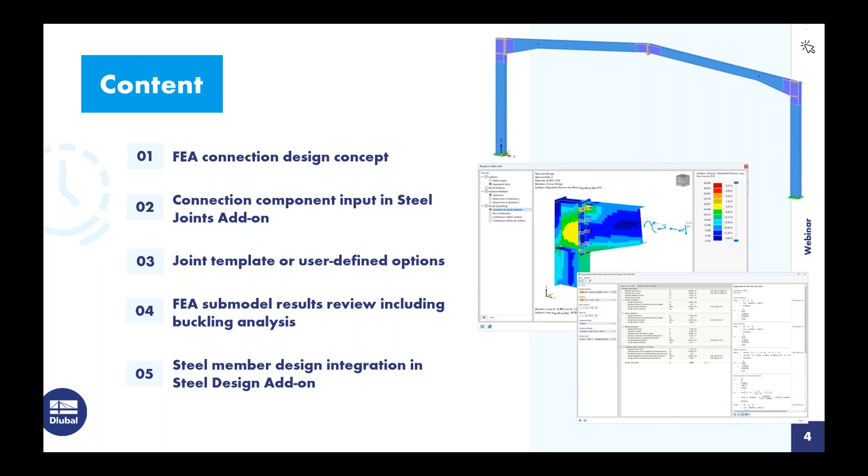So we might be wondering, well, why would we utilize FEA for steel connection design? And obviously the biggest benefit is going to be the design of non-standard or unique connections. So most likely you have a solution for very basic or standard connections. A lot of software offers this, or even hand calculations. But when we look at this connection over here on the right-hand side with a lot of different components going on, it becomes a little bit more difficult.

So this new steel joints add-on within RFEM allows us to consider the components and the members both in plane and out of plane in one single FEA model. We also can consider complex loading. So if we are modeling the entire steel structure within RFEM, we can apply any of the member loads or unique loading scenarios to the structure itself. The member internal forces at the member ends at the joint will simply be used for the connection design.

So no need to integrate those member end forces into an external program. Again, everything is done within this single file. The submodel is automatically generated underneath the hood of RFEM. So this really doesn't require an expertise level knowing how to create these FEA models. They are rather complex, but rather if you just have a general FEA knowledge, you can go ahead and utilize this capability within the program.

We also will perform the AISC design checks of these connections for our bolts, our welds, and our plates, but we will take it a step further to create a second submodel to carry out the buckling analysis. So we'll be able to view the different eigenmodes and failure buckling modes of this connection, as well as the critical load factors. We'll see that a little bit further in the example today.

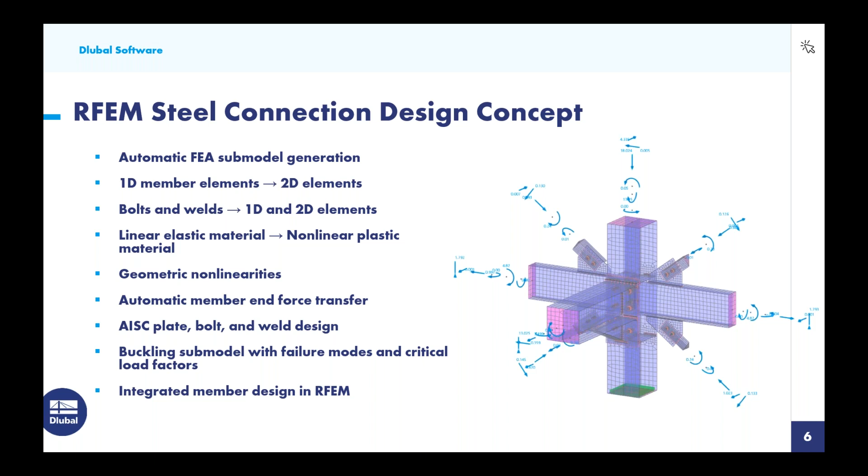And finally, the integrated member design within RFEM. Of course, we can get the connection design, but the ability to design the members themselves, and not just steel, but any material that we offer. So you could combine this connection design with concrete, aluminum, cold form steel, even topics like fabric tensile structures. We could do the steel connection design within that same file.

Okay, so we will begin then in RFEM here with our initial example. When we create a new model, we will give it a model name. The type of model here is going to be in a 3D environment. So although we just have a simplified 2D frame here, we still are accounting for all forces in and out of plane.

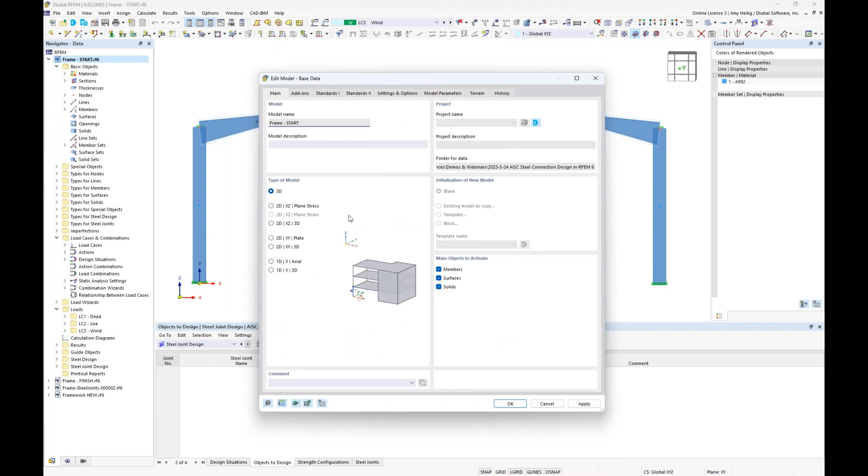Under the second tab, so for those of you who are not familiar with our program, RFEM is the base program. This is where we can fully model, load a structure, and get the full static analysis. But if we want to do a more advanced analysis like dynamics, for example, or we want to do design according to the various standards, this is where we would need to activate these optional add-ons. So you would purchase the add-ons that are specific for your project design.

Now for today, we'll be activating here the steel design. So this carries out the steel member design according to the AISC, and of course the steel joints for our connection design.

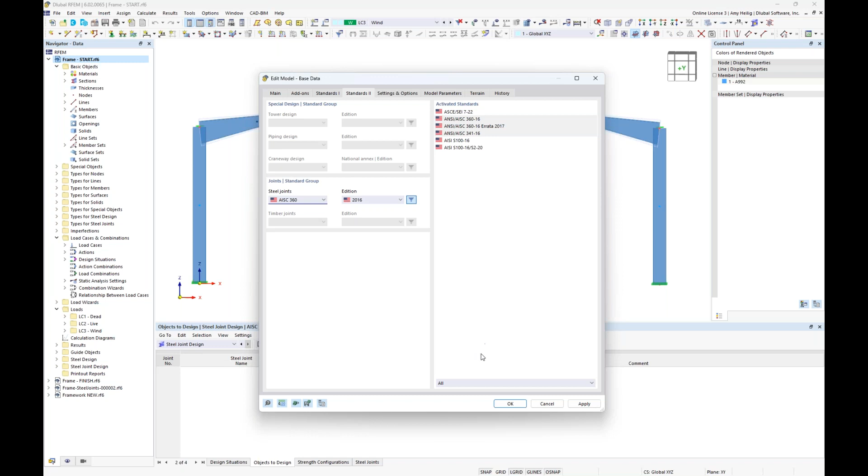Under the third tab, we will generate the load combinations automatically according to the ASCE 7. We have added the 2022 standard, so that's available here. The steel member design will be carried out according to the AISC 360 2016. And under our fourth tab here, standards 2, the steel connection design will be carried out also according to the AISC 360.

So once all of this information is input into our base data, as you can see here for the sake of time, I've already modeled this simple 2D frame here. So let us just quickly go over some of the information already shown.

Well, if we turn this into wireframe view, these members, as I mentioned, are just standard one-dimensional elements. So this is pretty usual for any FEA program, that when we model columns or beams or braces, they're represented by this single line only. But if we turn this into rendered view, we get a better understanding of what this line represents.

Now, we also have here the materials assigned to these members, and currently these are all A992 linear elastic materials. We also have our cross sections.

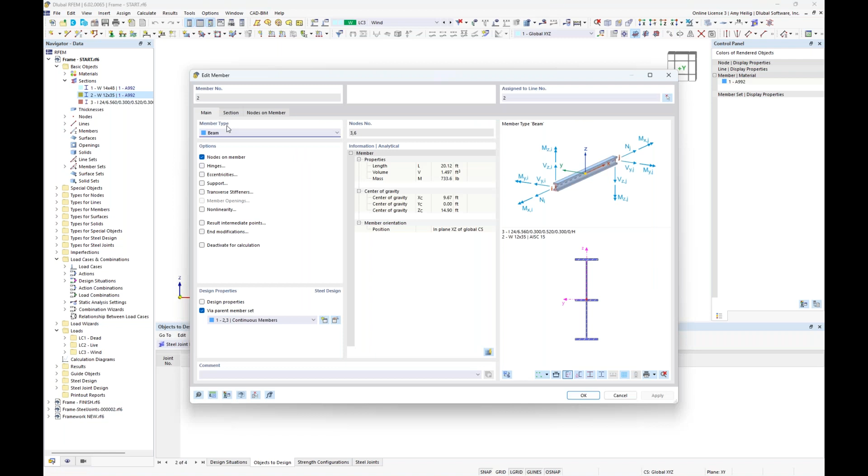You can see here the columns are assigned as W14x48. And for my beam members, these are W12x35s. But I also have applied a small taper at the beam member end. So if we double click on this member to go into the beam dialog box, under the second tab here, section, we do have the ability to set a taper at the member start or the member end and other multiple options here.

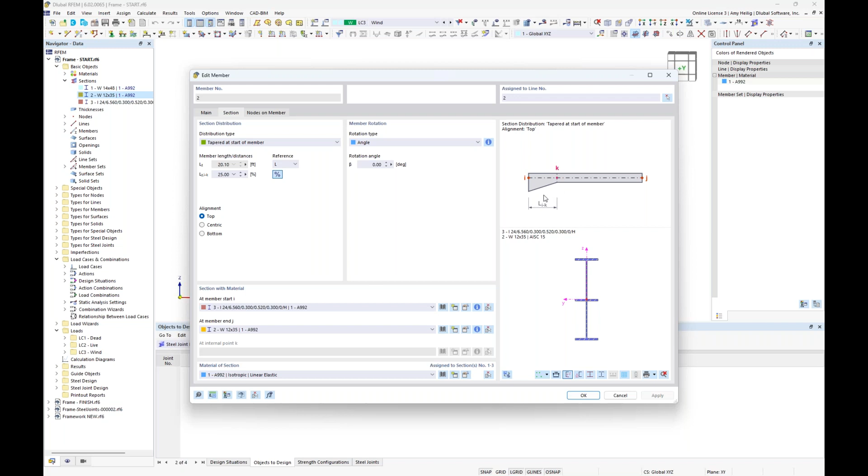So I'm currently applying this taper at the first 25% of the member length. And we also can align the taper to the top of the member, for example, and this picture over here will update accordingly. So as mentioned, the beams are primarily W12x35, but where this taper occurs at the member start, I took that W12x35, I created it as a user-defined section to simply increase the depth. So now we'll linearly transition in the first 25% of this beam member back to the W12x35. So that's a little bit about what's going on with our members.

So turning this back into wireframe view to quickly explain our support conditions, we have a fully fixed support down here at the bottom, which was just applied by utilizing the assign nodal support up here in my toolbar. And also because we are working in a 3D environment, I went ahead and put some additional spring supports up here only in the lateral global Y direction. So we'll account for maybe additional members framing in to give that lateral stability at the top of our frame.

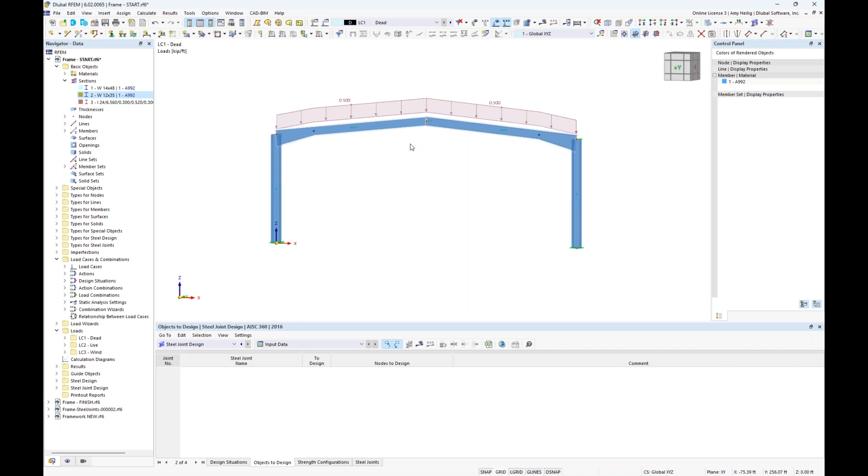And finally, we want to cover the loading. So we have 3 simple load cases for today, and we can see these within our drop-down box up here at the top. If I turn on my loads, my dead load is 0.5 kips per foot, applied as a member load. When we look at our live load, same concept here, just with a reduced magnitude of 0.3 kips per foot. And then a very simple lateral load here for our wind load case with 0.3 kips per foot at the front side and 0.15 kips per foot at the rear side.

Going into our load cases and combinations dialog box, we will once again see here under our load cases our 3 simple load cases for today, dead, live, and wind. Category was set accordingly to the ASCE 7. The program is automatically going to generate 2 design situations for us. We have here our LRFD design situation and our ASD design situation. This is really nothing more than just grouping together all of our factored load combinations according to the ASCE 7 for this first design situation. And we can click on this little info button here to see the code references to those load combinations directly.

Now notice that these are used within these optional add-ons that we turned on, so steel design and our steel joint or connection design. I will be utilizing these design situations. I'm carrying out my design according to LRFD for today. Now we also have this second design situation, which is just simply grouping together our unfactored load combinations. I'm going to use this for my serviceability checks for my steel member design, but we really don't need it for our connection design because serviceability is not something that we're going to check.

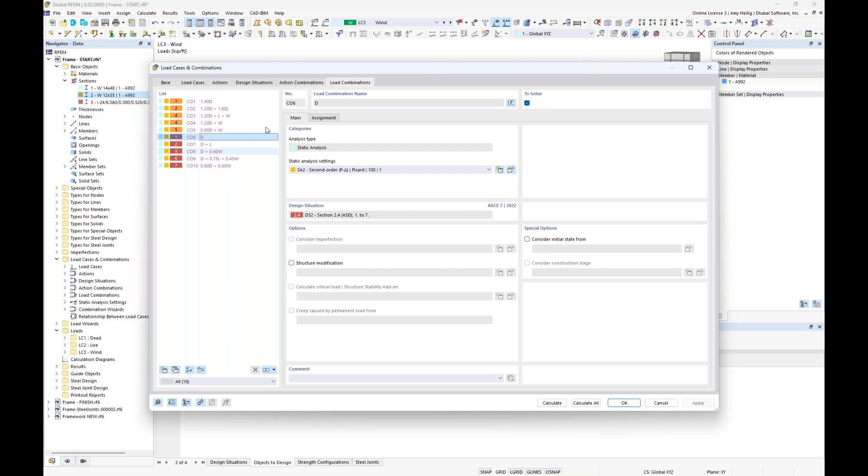Now, alternatively, if you were carrying out ASD design for both your members and your connections, we could go ahead and turn it on here and maybe we deactivate it for the LRFD design situation. But again, moving forward with LRFD design, we'll go ahead and leave these options as default. And finally, under the load combinations, you can see here the individual load combinations listed out based on the load cases I have defined. All of my factored load combinations are shown here in orange, which belong to that first design situation. And then we have our unfactored load combinations shown in red that belong to the second design situation. So just keep these design situations in mind. We'll come back to them a little bit later on.

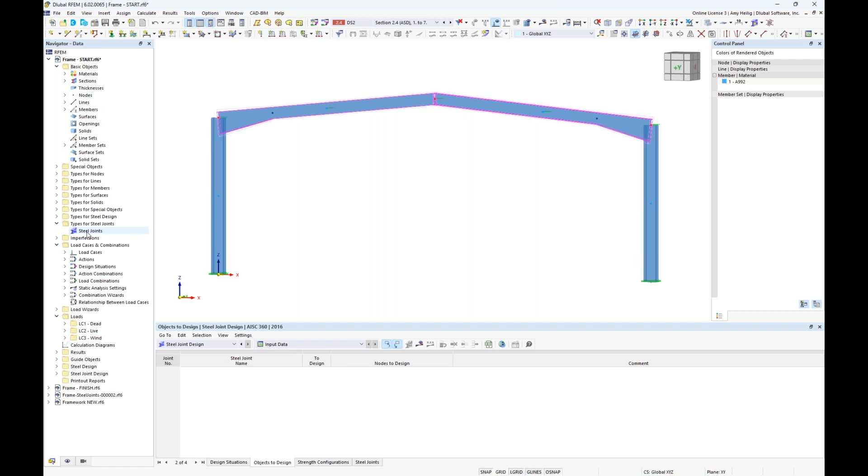So now that we have fully reviewed this model, let us begin by defining our first connection. So because I have activated the steel joints add-on under my base data, we now have a folder option over here on the left called types for steel joints. Well, currently this is empty, but I can right click to create a new steel joint. And initially, I want to select the node that I would like to apply my first connection. So we can graphically select node number 6, or I could directly input the number here into this dialog box. Both of my members were automatically brought in.

Looking at this second tab. So remember that we are going to more or less extract out this submodel for our connection design and run it completely separate from our steel frame that's happening here in RFEM. And because of this, we need to fully support one of these members in that submodel. So we'll go ahead and utilize the support for the beam over on the left.

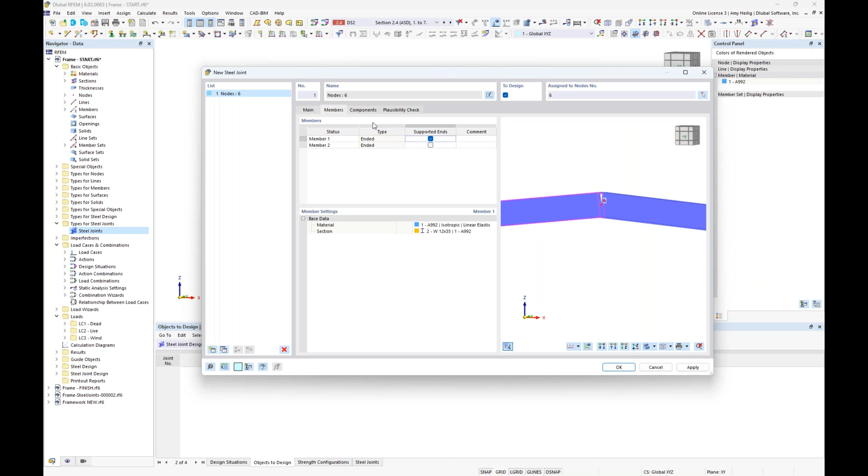Now the type is set to ended. This only means that if all of these members simply end at this connection, then the type would be set to ended. Now, in another scenario where we maybe had a continuous column passing up through here, but it was modeled as two separate members back in RFEM, then we would have an additional type option available to us in a dropdown called continuous.

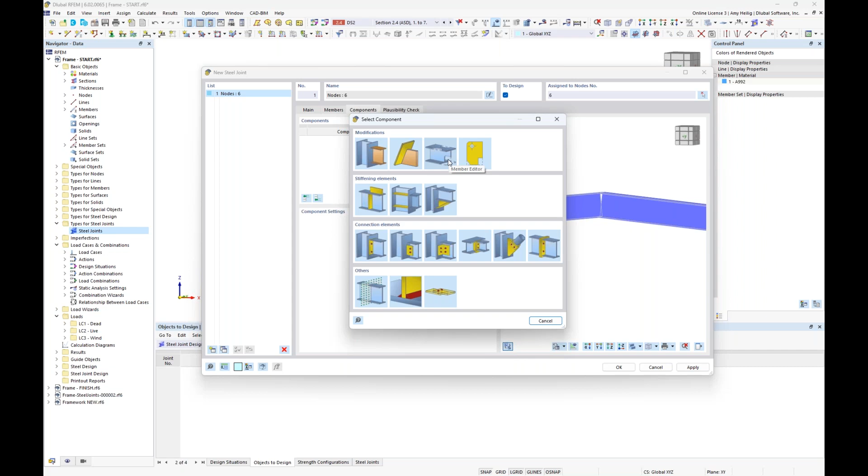Under the Components tab, this is where we begin to build up our connection components. And we could certainly individually do this with our component database. And we see each one of these components that we can individually input, such as end plates, or we can input fin plates, cleats, maybe plate-to-plate connections for beam splices. We also have stiffeners and haunches, and then we have some additional modifications up here that more so relate to the geometry. So we can make member cuts, or we can add in openings or notches into our beam elements.

But rather than inputting these individual components, we could also take advantage here of our library options. And within these joint template library options, we have 4 general categories, including rigid connections, pin connections. We also have truss connections and brace connections. So beginning here with the rigid connections, we have additional subcategories such as beam to column, and so on. And within these subcategories, we have additional template options.

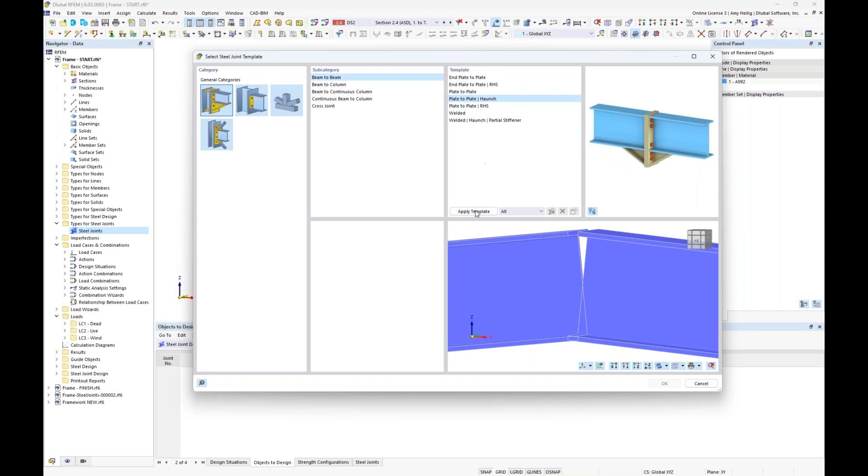So looking at the beam to beam, we have an end plate to plate. We have an end plate to plate with a rectangular hollow section. For today, we're going to utilize this option plate to plate with a haunch. So when I click apply template here, it's automatically going to apply these components from this library to my specific members here within my RFEM model. So I can click OK, and now we see these individual components listed out here and applied again to the members within the RFEM model background.

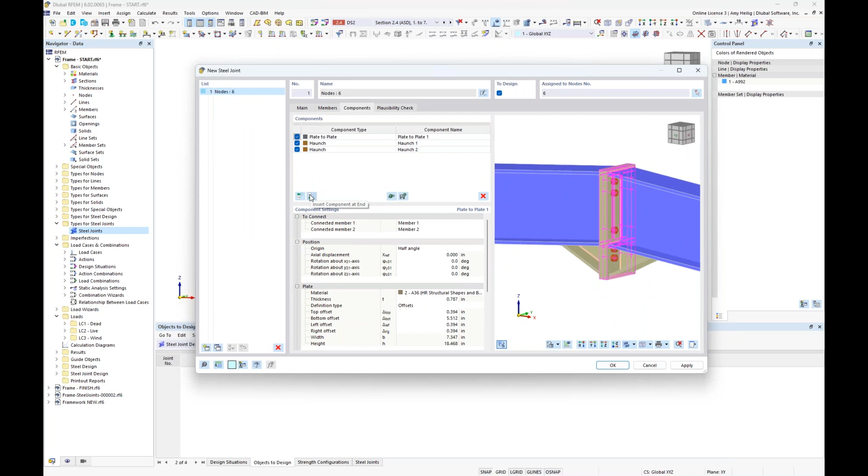Now, we could certainly add on with the individual components here and just use the library as a starting point. We'll certainly need to make some modifications here to our geometry, but once you have your connection set and you utilize this connection quite often, it's always recommended to save this under your own user-defined template as well. So you can see here within this button, we could give the connection a name, set the filter categories and subcategories, and now that connection will always be available for any future RFEM model. So that could certainly be helpful if you don't want to redefine the geometry changes or components every time.

So starting off with the first component, you can see here it is plate to plate. We are connecting both members 1 and 2. We can make modifications to the position, but we'll go ahead and leave all of this as default. Now we do need to define the material of these plates. I already have A36 defined within my RFEM model, but if you did not, you could just access our material dialog box with these 3 buttons here.

So within the material dialog box, we can further activate the material library. Over on the left, utilizing our filters to steel, to the AISC 360, then we could go ahead and choose whichever relevant steel material we'd like for this particular component. Again, utilizing the A36 that's already been defined, I will modify here the thickness of my plate. So we can go ahead and change each plate to 0.5 inches thick for a total thickness of 1 inch.

And now we need to define the plate offset. The offset just means what is the distance from the top of the plate to the top of the flange, and then the bottom of the flange to the bottom of the plate, as well as left and right. So starting off with the top offset, I'm going to modify this to actually a negative 0.375 value. I'm going to drop this plate down below the top flanges here on my beam in the event that we have some type of sheathing material that we don't want to interfere here with these plates.

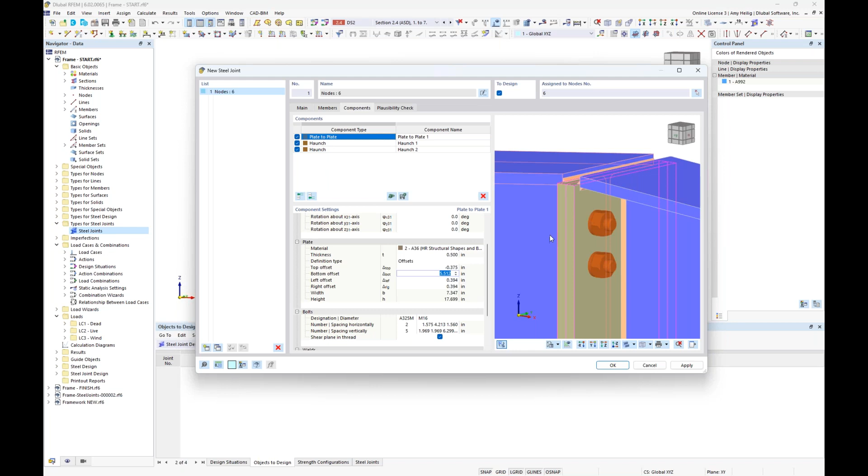Now, as far as my bottom offset, we'll go ahead and modify this to around 5 inches. And then we have the offset on the left and right, which I will set at 0.5 inches for the left, and I just hit enter on my keyboard, and 0.5 inches on the right. Now, the dimensions of the plate will automatically update here.

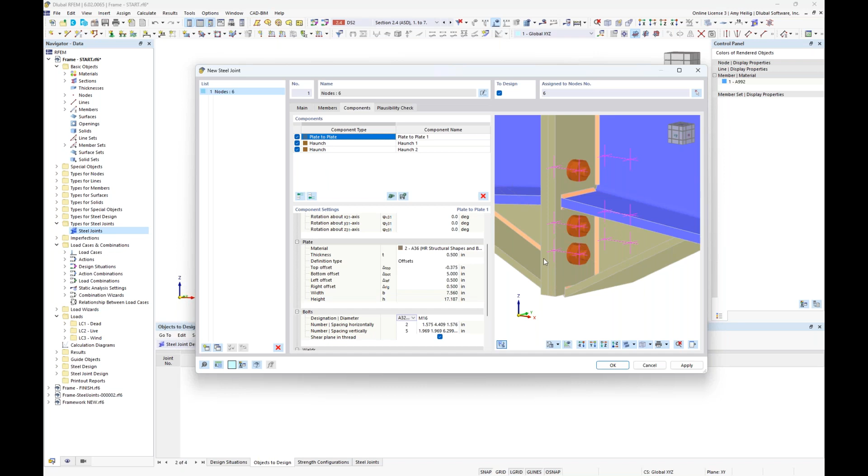Next up is our bolts. So we have here the designation of the bolts within our dropdown. We will select A325. And in the drop-down box next to this, we can then select the diameter. So we'll choose 3/4 inch diameter for our bolt layout today. Then we have the number of bolts in the horizontal direction as well as the spacing. So currently we have 2 bolts in the horizontal direction, one on the left and one on the right. So we'll go ahead and stick with a total number of 2 bolts.

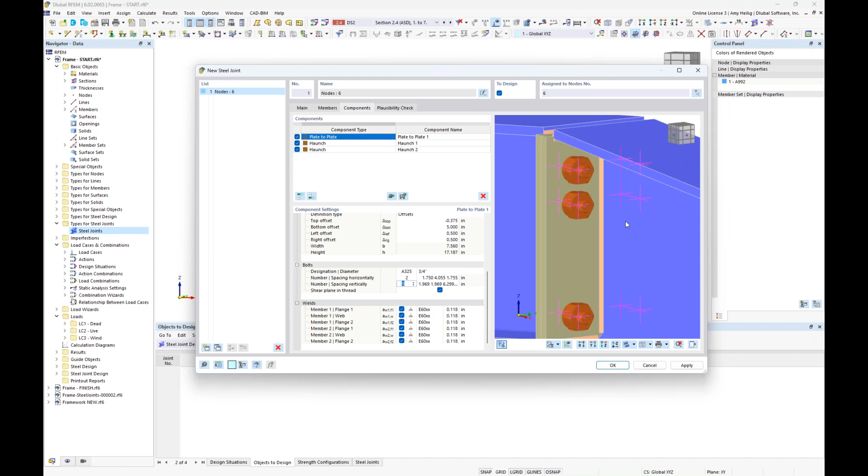The input here in our second column is just simply the horizontal spacing. So the first spacing that we would want to input in here is just going to be the distance from the edge of the plate to the center of the first bolt. So I can input in 1.75 inches. I hit space on my keyboard. The next distance is from the bolt here to the bolt on the other side, and that's going to be 4.055. And then if I just hit enter, the program is intelligent enough to set that additional dimension here from the center of the bolt to the edge of the plate. Now, keep in mind that the program will attempt to center these horizontally, so you may not need to make any changes there, but if we want to adjust that spacing, this is how we would do so.

Now, as far as the bolts in the vertical direction, currently we have 5 bolts, but I'd like to reduce this to 3 bolts instead. And obviously, once we update this, we need to adjust our spacing. So we have the vertical spacing. The first input option is going to be from the top of plate to the center of my first bolt, which will be 3.5 inches. I hit space on my keyboard. The next spacing will be from this first bolt to the second bolt, which will be 5.5 inches. I hit space again, and we need to lastly define the spacing between bolt number 2 and bolt number 3 as 5 inches. I hit enter on my keyboard. The program will populate the last spacing here from our bolt down to the bottom of the plate.

Now, is the thread located in the shear plane for our bolts? If so, we leave this option turned on. If not, we would go ahead and uncheck it. And finally, we move on to the welds. So we can see here that these welds are labeled within this first column, but as I scroll through them here, they're also highlighted graphically. And if I didn't want to apply any one of these welds, I could just simply uncheck it here, and that weld would be taken away from this particular connection.

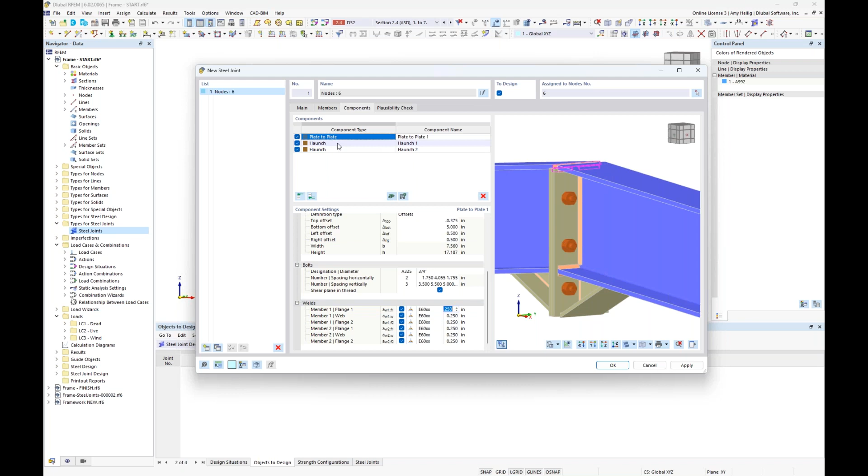So that will really sum up now our first component and any of those geometry changes. We now want to move on to our second component, which is a haunch. So we see it's highlighted over here on the left-hand side, and we're currently referencing member number 1 and the particular web.

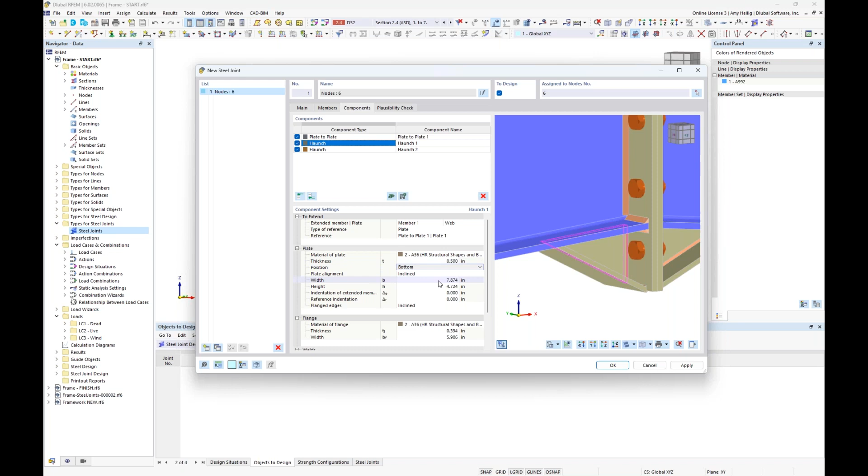And we want this haunch to be extended then to our plate shown here. The material is set to A36. We do want to modify here the thickness to maybe 0.5 inches. We can also modify the width and the height. So I'll modify the width here to 12 inches, and we should see that graphically display here. The height is going to be 5 inches.

And you'll also see that the program automatically included a flange here as part of my haunch. If I wanted to get rid of that flange, I could go ahead and use my drop-down box here to select the no option, and that flange should disappear.

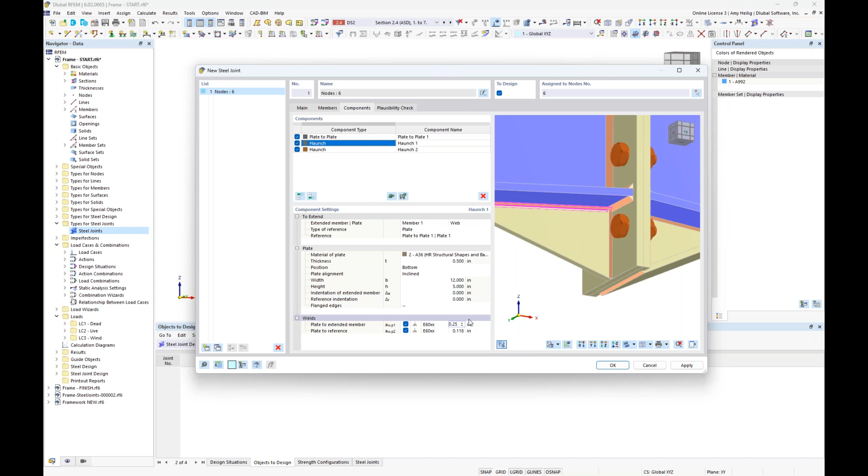Now, finally, we have our weld input for the haunch itself, and we have two welds, which we'll go ahead and again leave as a default double fillet weld on either side. But our first weld is on the underside from the plate to the bottom flange, where we will modify the throat thickness to 0.25. And our second weld is going to be from the haunch to this end plate here, which again, we will modify that throat thickness to 0.25 as well.

So looking at our haunch, again, we're complete with this second component. We move over here on the right-hand side, and we want to make those exact same changes that we just did to the left-hand side. So we'll modify here the thickness to 0.5 inches. We want to modify the width to 12 and the height to 5 inches. And then we will also want to select no flange here in our drop-down. And finally, we will modify the throat thickness to 0.25 for both of those input options.

So realistically, this connection is now complete. And again, if you utilize this connection quite often, save it to your user-defined library so you can pull it open with these modifications already set.

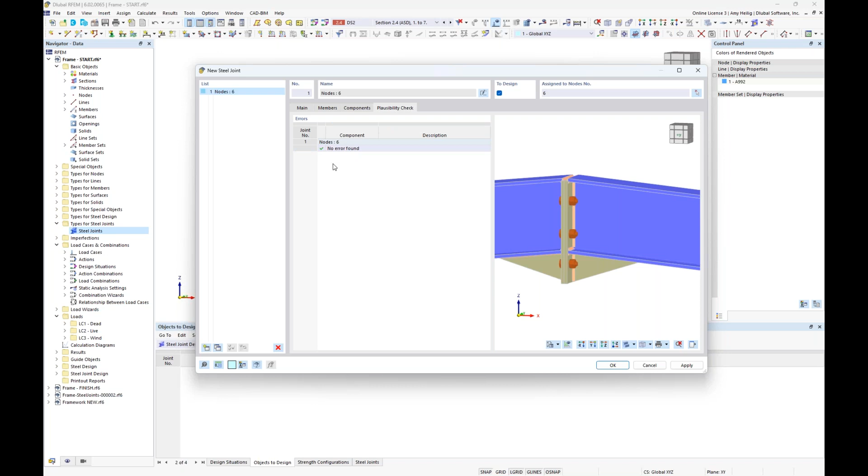The final thing to do with any connection is to check out this fourth tab, the plausibility check. So we see here, it's a green checkbox with no errors found. If we had any issues, such as maybe bolts overlapping welds or plate elements, or maybe we have a weld extending beyond a plate, these would all be flagged here so that we could take care of those errors before we move forward with the calculation.

So now that this connection is complete, we can click OK here. And what we should see is that graphically, we're going to represent this connection here within the main RFEM model. Now, to explain a little bit further about what's going on, you'll notice that when I turn this to wireframe view, we still have those one-dimensional members. And notice that these members are still framing from node to node.

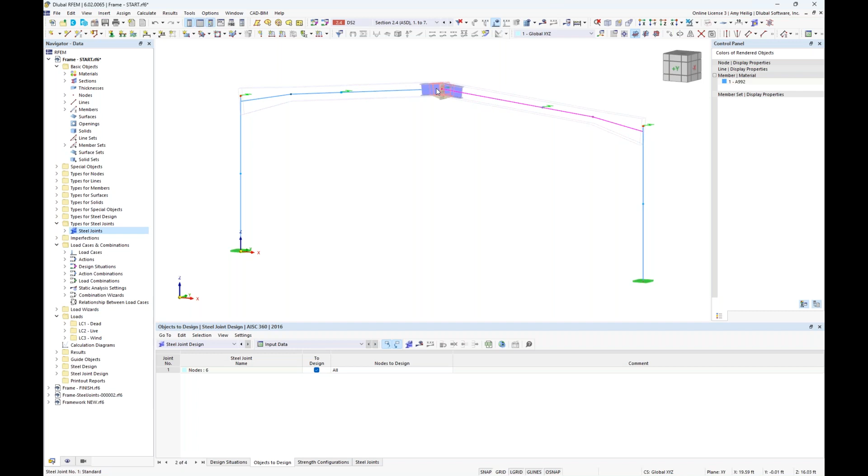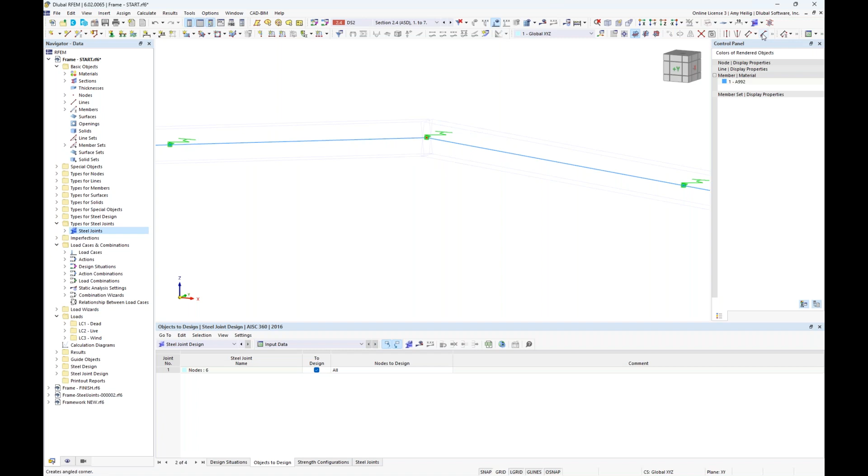Going back then into the rendered view, we can see this connection here with all of the available components, the geometry changes that we just input. Now, with the display of our connection, we also have an additional option up here in our toolbar where we can completely hide that joint model with this dropdown if we're not interested in seeing it. We also have this simplified joint model, which is just represented by some box type symbols here. And finally, we have the detailed joint model, which is currently default and turned on.

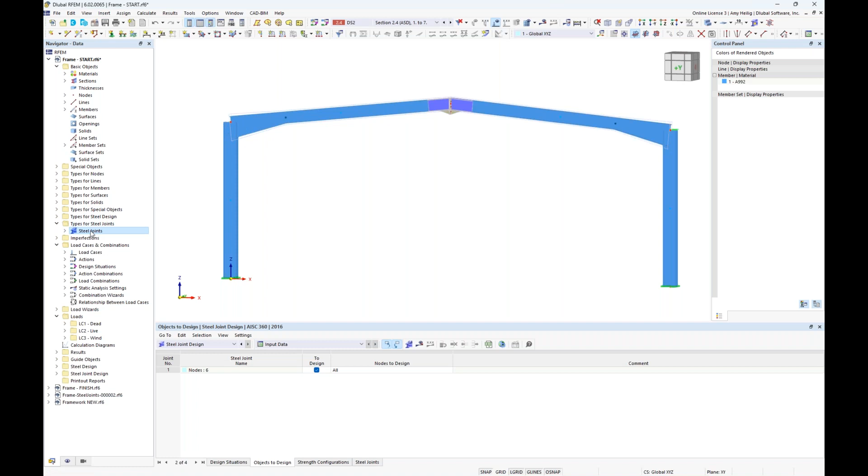So now that we have defined this first connection, we would like to move on to our second connection, which is going to be the tapered beam to the column. So we can yet again right click over here in the types for steel joints to create a new steel joint definition. And we want to graphically select here node number 3.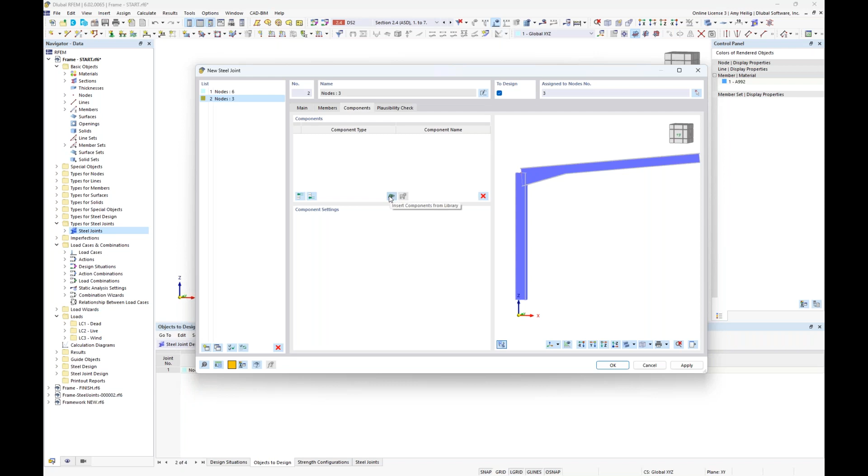I click OK. The two members are automatically imported in here, and under the second tab, if you remember, because we're creating that FEA submodel, at least one of these members needs to be fully supported. So we'll go ahead and leave the column as fully supported. Under the components, we will take advantage of our library option here.

And this time under our rigid connection, we want to modify this to a beam to a column. And within the additional template options over here, many different options, including cleats, maybe we have an end plate to plate. For today, we want to utilize the column with stiffeners. I'm going to hit apply, and yet again, we should see these individual components applied directly to my model.

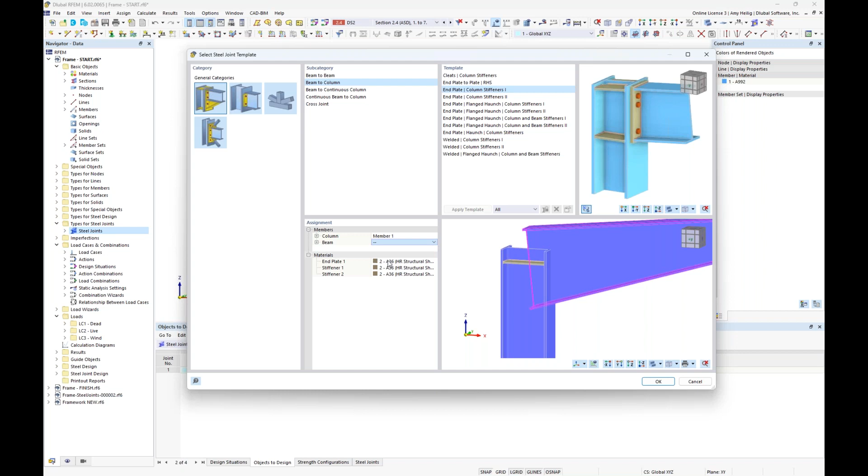I think we could all look at this connection and be in agreement that this certainly does not look correct. And this is really just an issue of the program not knowing which member is the beam versus which member is the column. And that's controlled simply with our options over here on the left. So in our dropdown for our column, we want to change this to member number 1. And then our beam element, we want to specify as member number 2. And now this connection should look quite a bit better. So we click OK.

And just like what we saw with our previous joint, we will now see all of those components individually listed out here. So let us begin with the end plate. And you can see here with the end plate, we are taking member number 2, which is that tapered member, and we are connecting it to the reference member number 1. Steel A36 will be utilized for the material. If we want to modify the thickness, we can input this in as 0.75.

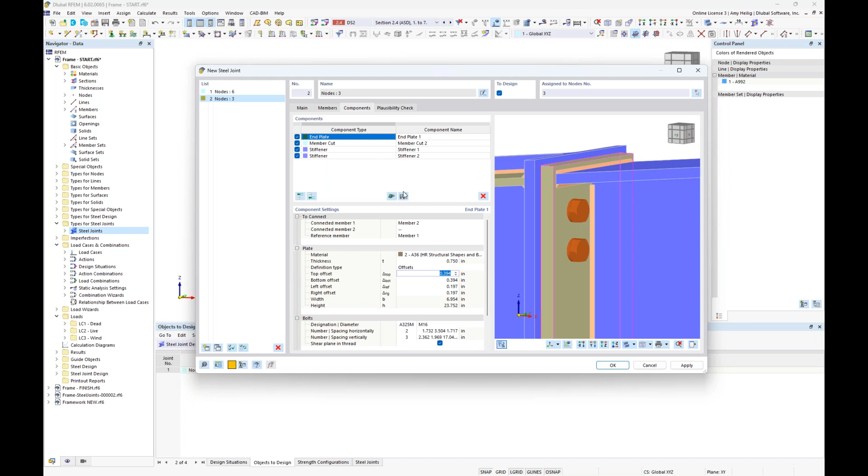And very similar to our last plate element, we would want to define the offsets. So looking up here at our top offset, remember the top of the flange to the top of the plate, we'll go ahead and modify this to 0.5 inches. When we look at the offset at the bottom here, we will modify this to 1 inch. And then we have an offset on the left and the right hand side of those flanges, and we'll go ahead and set this as 0.25 on the left and 0.25 inches on the right.

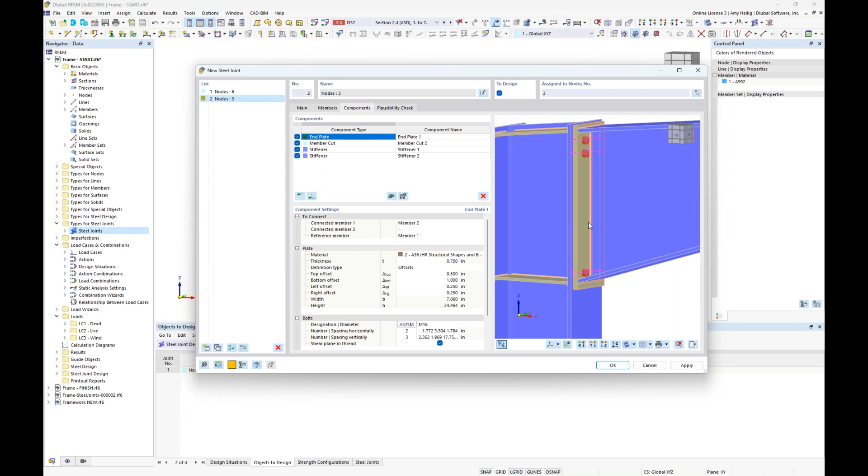Now looking at our bolts, again, clearly we need to make some modifications here. So we will be selecting A325 from our dropdown. The diameter of the bolt is going to be 7/8 inches. We are going to leave this as 2 bolts on either side, so 1 bolt on the left, 1 bolt on the right. The program again has centered these, so I will go ahead and leave these as default options now. As far as the vertical bolts, currently we have 3 shown, but I want to increase this to 4.

So once I input the 4 bolts, we'll make some modifications here to our vertical spacing as well. The first input option is from the top of the plate to the center of this first bolt in the vertical direction, which will be 3.5 inches. I hit space on my keyboard. We now need to define the spacing from bolt number 1 to bolt number 2, which will be 5.5. And I'm actually going to apply 5.5 inches to the additional spacing 3 times then between all of these bolts. I then hit enter on my keyboard. We see all of those update graphically here. We'll leave the shear plane and thread turned on.

And finally, we have our welds. So we have the weld at the top flange, again, leaving the fillet weld on either side as default with E60 strength. We'll modify the throat thickness to 0.25 once again. We take a look at our weld at the web here. We'll go ahead and modify this throat thickness at 0.25, and we do the same thing for our weld down here at the bottom, modifying this thickness to 0.25. So now our end plate is complete.

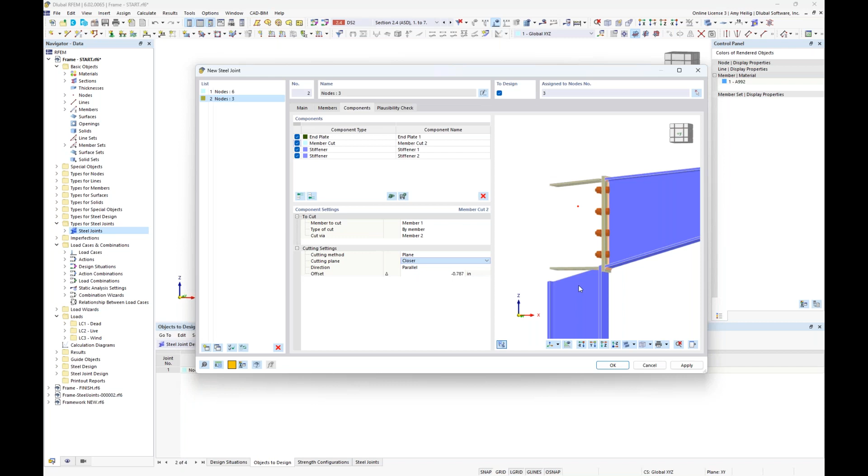When I set this to closer, notice that the column is automatically cut off at the bottom flange. But when I use the option farther, we'll extend that column to the top flange instead. Additionally, the cut of this column is matching the incline or pitch of my tapered member shown here in this 2-dimensional frame.

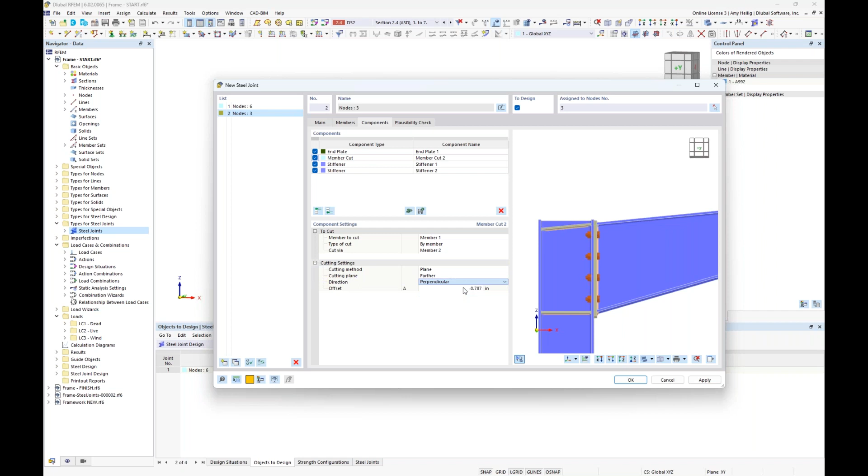If we want this column completely straight across, we can use the drop-down options to choose perpendicular instead. Now notice that column is cut straight across, not considering that incline. We'll match that pitch by changing this back to parallel, and now that will match the top flange of my tapered beam.

We also have the ability to set an offset. If I have this offset set at 0, it simply makes that member cut match the top flange, or I can set this offset to negative 0.787 inches, which will extend it slightly above the top of this beam. So that's all that is needed for our second component.

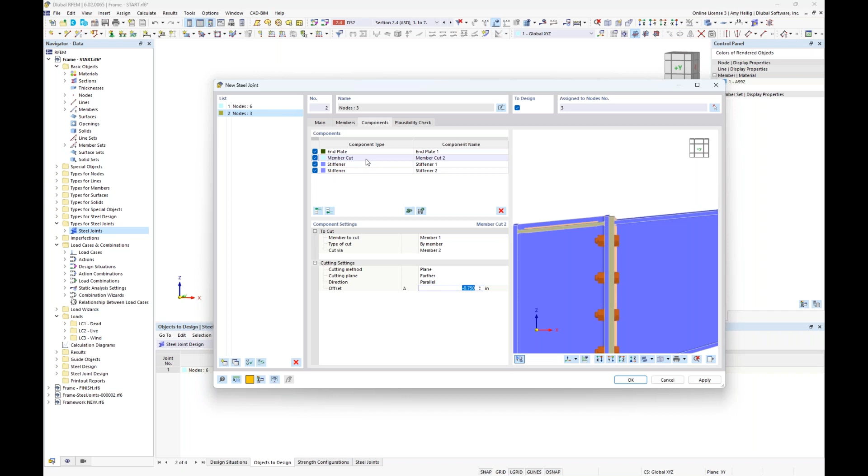We now want to move on to the stiffener. We see here this stiffener applied, and the stiffened member is referencing member number 1, but we want to apply these stiffeners based on referencing member number 2, the beam. The material is A36 once again. Perhaps we want to modify the thickness to 0.5 inches. And we are applying these stiffeners based off the member plate flange number 1 here of our beam, so everything is parallel to that top flange.

Alternatively, if I didn't want it to be parallel, I can make it perpendicular so that we have the stiffener going straight across. Of course, this doesn't make sense here because our column isn't extended up high enough. So we'll change this back to parallel.

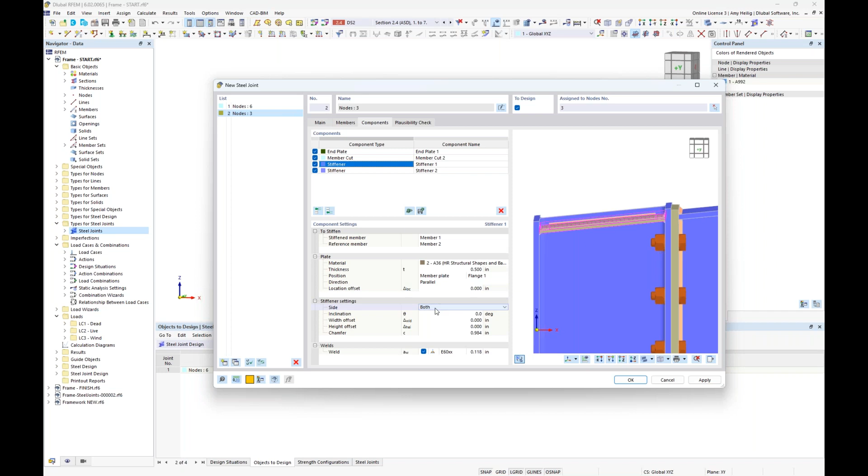We could also add in an offset to move the stiffener up or down. We also have the ability here to set the stiffener on both sides, or within this drop-down option, we could choose just the left or just the right. And finally, as far as geometry, we have a small chamfer here, so we want to set this dimension to 1 inch exactly.

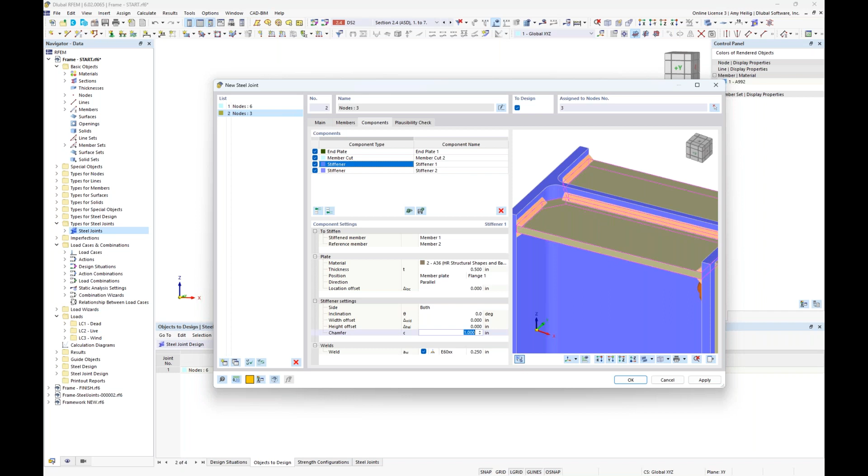Finally, we have the weld. Just like what we saw with our other weld input for our additional components, we're going to leave this as a double fillet weld, E60, with a throat thickness of 0.25. So this is just connecting that stiffener back to the column.

Now we also have our last component here for our stiffener shown at the bottom flange. Again, if I didn't want to account for it, I could just completely turn it off. Or if I wanted to delete it altogether, I can use this red checkbox, so I just make sure that I'm selected here under that particular component.

I delete it altogether. The reason why I wanted to show you is that we have a nice feature here for existing components: if we right click, we can copy the component to the end of this list. And this is a huge advantage if we have made a lot of modifications to our component and we don't want to input all that information again—we simply make a copy.

Now, currently, the second stiffener is sitting right on top of the first stiffener, so that's not ideal. But what we can do here is simply move it by referencing, instead of flange number 1, flange number 2, which is highlighted here as I select it within my dropdown. Now currently it's set to parallel, so it matches the angle of that taper.

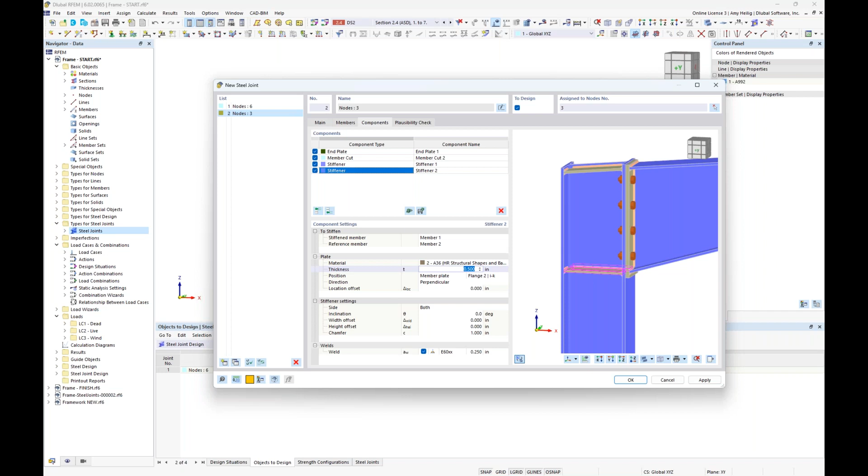But if we wanted to modify this to perpendicular, we can do so. Now we see that stiffener shown at the bottom in the perpendicular position. And if we wanted to modify the thickness to something smaller, we could do so here at 0.375. So now this fourth component is now complete.

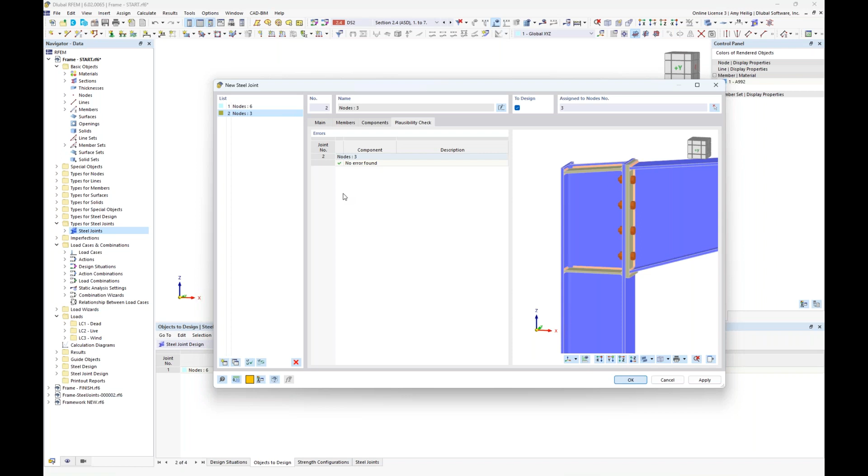Again, checking the plausibility, no errors found. That's great. If we had any issues with geometry or anything else, the program would notify us here. So when I click OK, we should now see this connection applied over here to the left-hand side.

What you will notice is that we actually want to apply this exact same connection here on the left-hand side to the right-hand side. Rather than redefining all of those additional components and a new steel joint, the program's intelligent enough that I can go back to node number 3 here, my connection that I just defined, and in addition select node number 11.

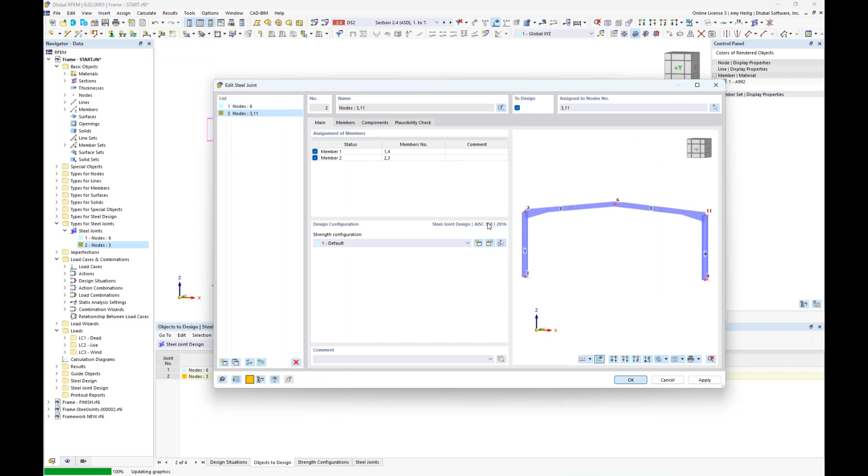And I click OK. So we have an identical layout for our joint template here. It's just simply the mirror image of the other side. So if you have the exact same connection details, but it's just slightly oriented differently within the model, you could certainly apply multiple nodes to the same joint definition.

All right, so we are almost ready to move forward with our analysis and design. But one thing I want to cover, if we go back into the steel joints and edit the dialog box, this brings us back into the dialog box we've previously been in, but you'll notice here there are design configurations. There is one option for strength configuration with a default setting already specified.

The strength configuration, if we edit this, is specific to the AISC design of our connection, but also that submodel that's going to be generated underneath the hood. We have to assign a configuration to each one of these joints, and you can also create different configuration settings for different joints.

Taking a look at the default option shown here, you'll notice the first option for my connection design is to also perform a buckling analysis. So we can go ahead and turn this on.

Now, I do want to let you know that you have to own the stability analysis add-on in order to carry out the buckling analysis in addition to the actual AISC connection design. So if you want to take it that step further, you do need to own the stability analysis add-on. You don't need to go back to the base data and activate it. Everything is controlled here through this dialog box.

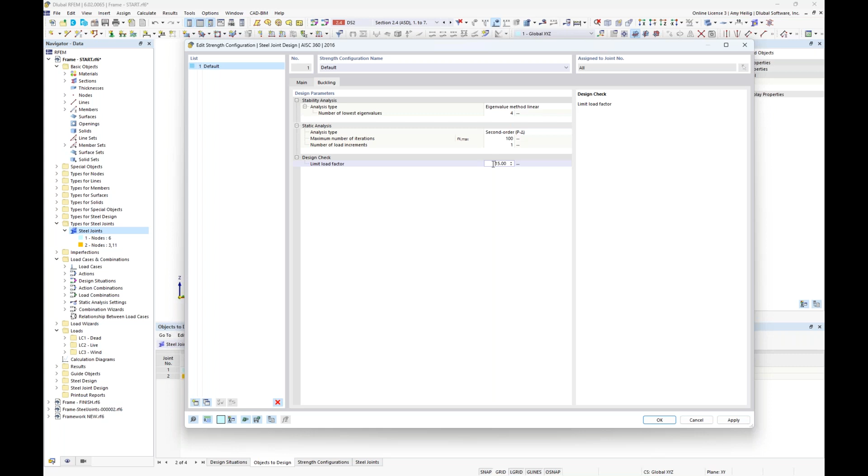Second order analysis is considered. And finally, we have the limit load factor. This is a user defined input option, and it relates back to that critical load factor. So when the critical load factor falls below 15.0, the program will flag you that maybe buckling is a consideration you need to look at further for your connection. Again, you have the ability to increase or decrease this factor. It'll make a little more sense once we look at the buckling results.

So going back to the main tab here, we have our resistance factors for LRFD design, straight from the AISC standards, safety factors for ASD, and a lot of this information down here at the bottom is specific to the FEA submodel and mesh generation. The FEA mesh back here in RFEM for our overall structure is going to most likely be entirely too large to apply to this much smaller submodel. So we will go ahead and submesh that to something much smaller, and we have some default options shown here, but you can always come in and modify the FE mesh settings as well for that submodel.

Now, one thing I do want to go into further detail is the limit plastic strain. You'll see this input is set by default at 5%. So let us go back to the PowerPoint to discuss this in a little more detail.

By inputting in this plastic strain limit, this is going to be used for the strength limit state criteria for all surfaces. And what I mean by surfaces, remember our one-dimensional members for our beams, our columns, these are all converted to 2D surfaces. So our flanges, our webs, our end plates, haunches, all of these are now 2D surfaces. We're probably utilizing a linear elastic material, but the program automatically converts this to a nonlinear plastic material. And with this material model, we are going to reference the von Mises yield criterion stress failure hypothesis.

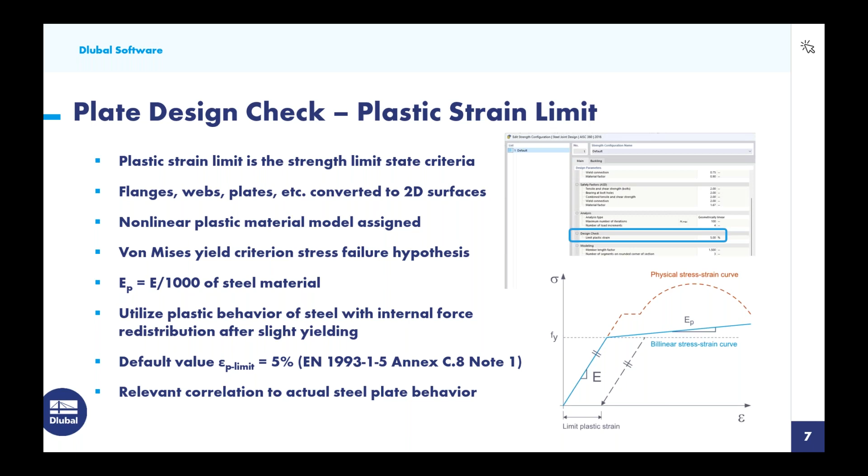But overall, there have been studies done on this that there really is good relevant correlation to the actual steel plate behavior by limiting the plastic strain instead of the stress. So again, that's what's going on here within our design configuration for all plate elements. This is the only check that we will carry out, by limiting that plastic strain.

So once this information is all input into our configurations, the final thing to do is to go back here to our RFEM model and to jump down to the steel joint design add-on.

So within this add-on in table format, we have here our two design situations, which we should remember as we covered those earlier. We have our LRFD design situation where we want to set this to the strength limit state for LRFD design. Now, alternatively, if I was carrying out ASD design, then it might look similar to this, where I use my dropdown to carry out my second design situation for my unfactored load combinations according to the strength limit state for ASD design. But I'm carrying out LRFD design today, so we'll go ahead and utilize that first design situation.

The objects to design, we will be designing all three connections here. And in a very similar workflow, we also have the steel member design. I did an entire webinar devoted entirely to the steel member design according to the AISC, which will clearly go into much more detail than what we have today. My point today is just the ability to design the members along with the connections.

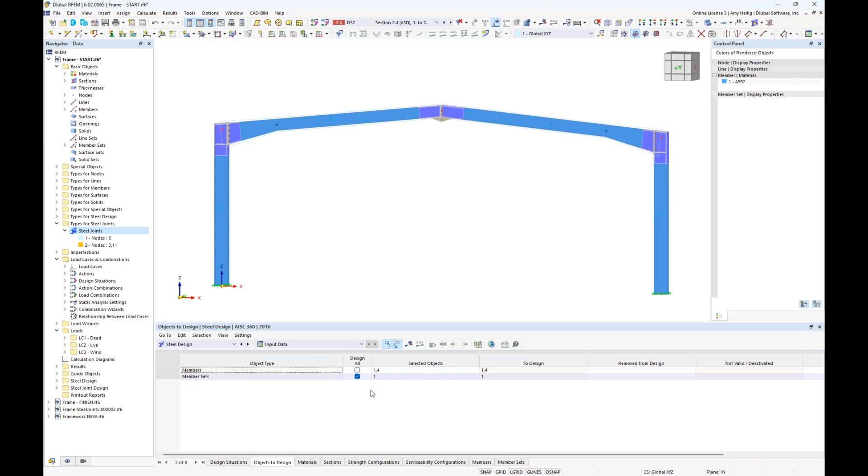So once we have input this information into the table, we are now ready to go to calculate all. But keep in mind, because we are now introducing these FEA submodels, it does take a few minutes to solve. So it will take a little bit longer than if we just had these steel 1D members alone. So for the sake of time, I'm going to open up an already saved model here that has carried out the calculation.

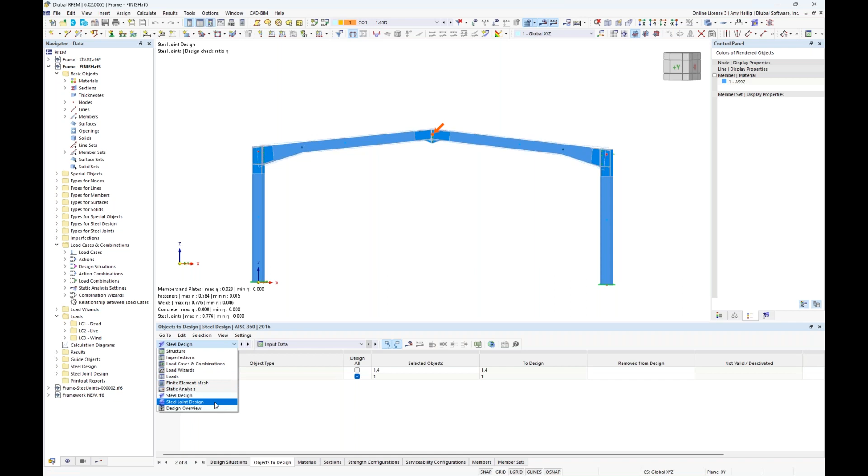Well, what we should see once we run our analysis and design under the steel joints table here is our results. And we can view the stress strain analysis design ratios by node. So now you'll notice here that I have 3 design checks for each connection. And these 3 design checks include the plate check, the bolt check, and the weld check.

And within any one of these specific design checks, such as the bolts here, I can go ahead and activate my design check details. And this is true for both the bolts and the welds. We'll take a look, though, only at the bolt elements. I'll go ahead and expand out my options over here on the left-hand side. I'll use my control key and I'll zoom in here to these equations. So hopefully those are a little bit easier for you to see.

But we are checking the bolts for all scenarios carried out by the AISC, including tension resistance, shear resistance, bearing, combined shear and tension, and so on. And then we take the max design ratio here out of all of these, and we'll go ahead and present it to you in that design ratio.

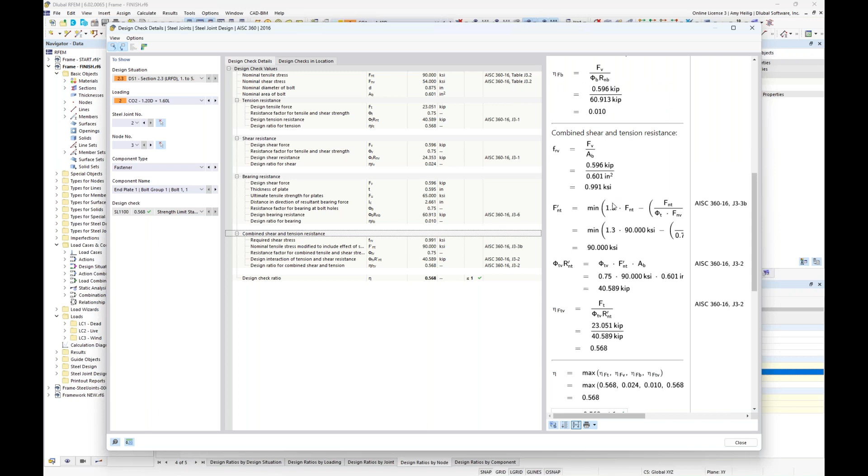But all of the code references are given here, all of the formulas line by line. The variables are listed out here. You can add this information to your printout report. So trying to be as transparent as possible about where these specific checks come from. Same concept for our welds.

If we look at our plate check, so this is currently for my connection shown here at the left and the right, which you can see are highlighted. I'll go ahead and open up my design check details here, and you can see this looks quite a bit simpler. And this just all goes back to the PowerPoint slide that we just covered, that for all of our plates, we're talking flanges, webs, end plates, haunches, we are only going to check this limit plastic strain.

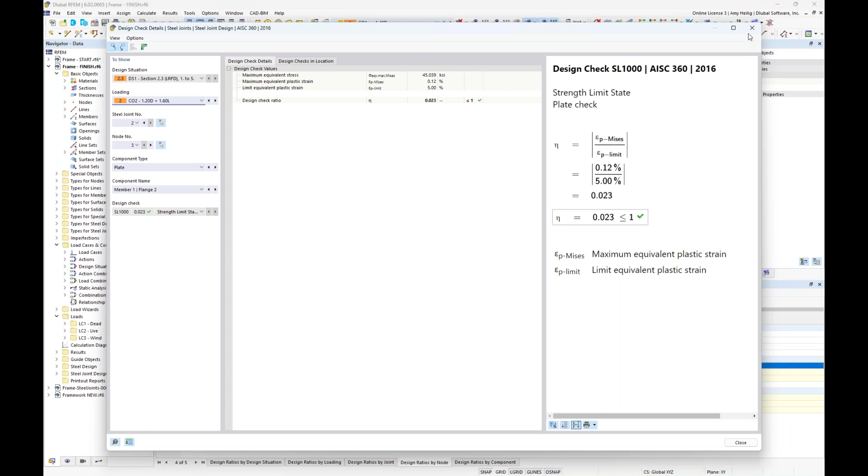So we have here the limit plastic strain set at 5%, and then we have our plastic strain from the actual analysis, and we ultimately get a design ratio. So that's going to be a little bit different here for our plate checks versus the bolts and the welds.

Now, in addition to the design check details, we also have the ability here called the results in steel joint. So we can go ahead and activate this, and this will actually show us our submodel here of this particular connection. So we're currently looking at the tapered beam to the column connection.

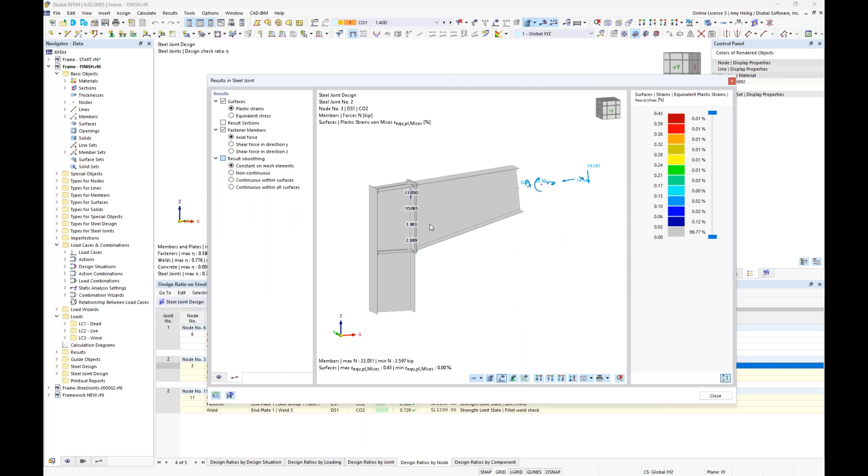And if I scroll here to my second tab, we are viewing the plastic strains for this connection for load combination number 2. And I zoom in here, and at first it really doesn't seem like much is going on. And that's just simply because we're going to gray out the strains that are probably not of much interest. But we do see some higher strains here at the top of the connection.

Now, alternatively, we can toggle this to the stresses instead. And this might look a little bit more interesting, that we can actually view the stresses for all of our components here graphically. And of course, where we saw those higher strains, we're also going to see those higher stresses given.

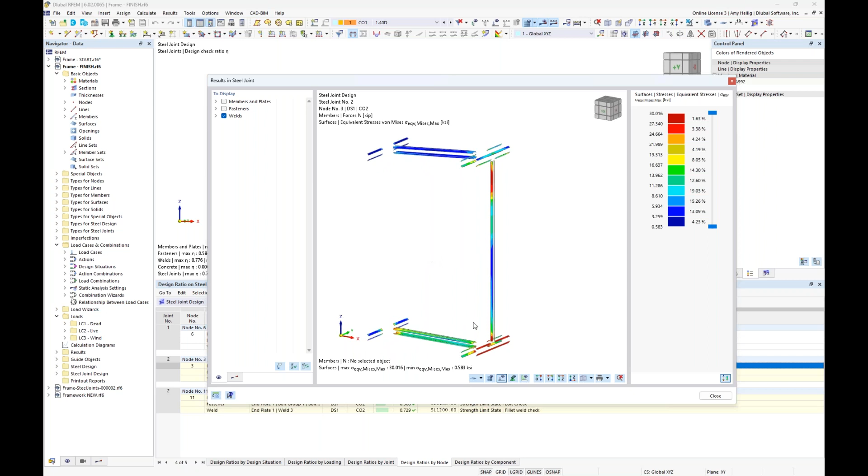So going back to this initial tab, if I go ahead and collapse these different display options here, I have the ability to actually turn off completely my members and plates and maybe my fasteners. And now I can view the stresses just on the weld elements themselves. Or if I'd like to turn on the bolts, I can go ahead and activate here the fasteners, and we see the tension forces in kips given to us graphically.

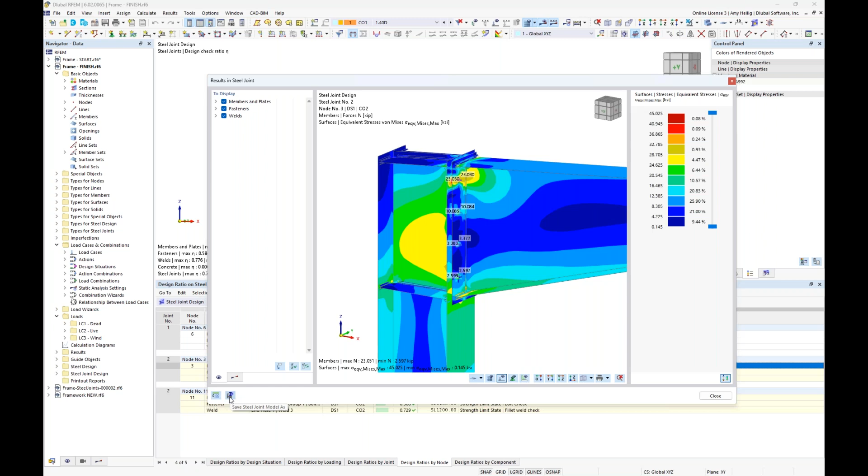And finally, going back to the display of all of these options, we go back to the stresses shown for all components. Now, in addition to viewing this information here, we have the ability to save this model to our computer. And when we save this model, we can open it up like any other RFEM model. So I went ahead and took the liberty to save that particular connection to my desktop so that we can see what this model actually looks like, that's all being created underneath the hood automatically for us.

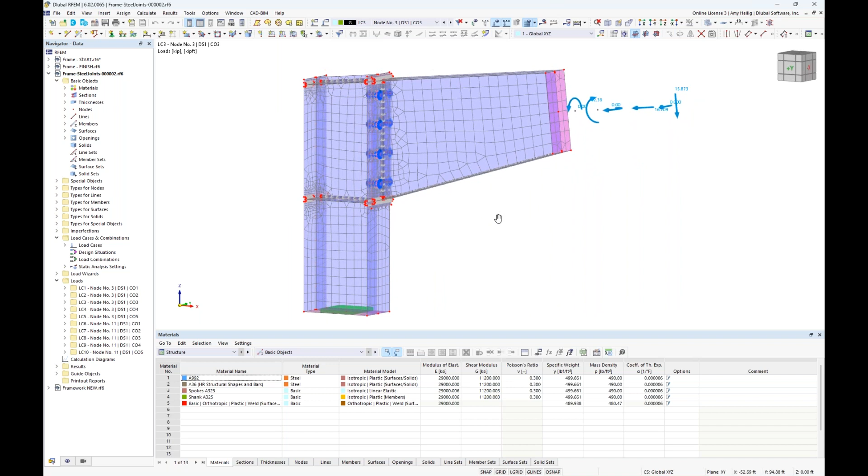So here is our exact same connection with the FEA model shown to us here in detail. So notice that the web elements, the flanges, everything was converted to these 2D surfaces. And if we turn this into a wireframe view, you'll see here everything is meshed automatically for us.

And perhaps if I go back to my navigator here to turn off the mesh, we can look at our weld elements. And these weld elements are a mix of 2D surfaces in order to get the stresses, but we are also transferring forces between the weld and the plate elements with these small rigid links.

We also have our bolt elements. So I had mentioned some of this in the PowerPoint, but if we double click here, we can actually see that these bolt elements are represented by a standard beam element. The cross section is also taken into consideration, the diameter here of our bolt element that we've set, as well as the material.

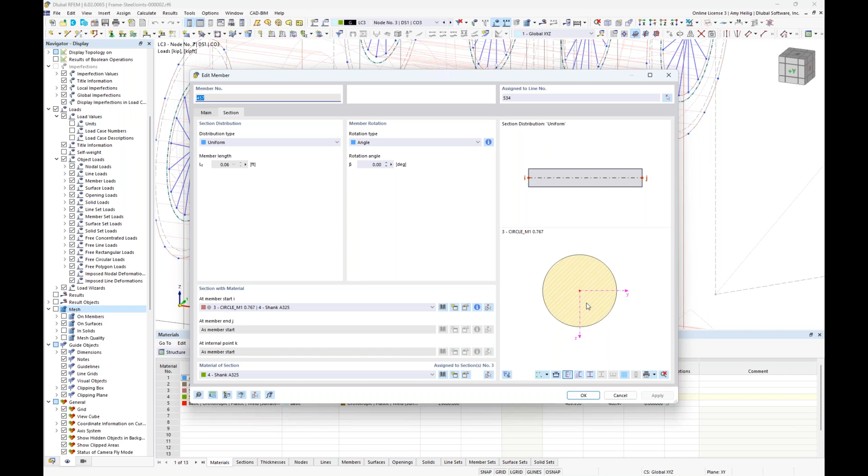And we are going to transfer the forces in this opening where the bolt is passing through with what we call these spoke members. And these spoke members are nothing more than beam elements themselves with a cross section assigned. And everything is optimized here with the cross section and the number of spoke members in order to transfer those forces between the plate element to the bolt and vice versa.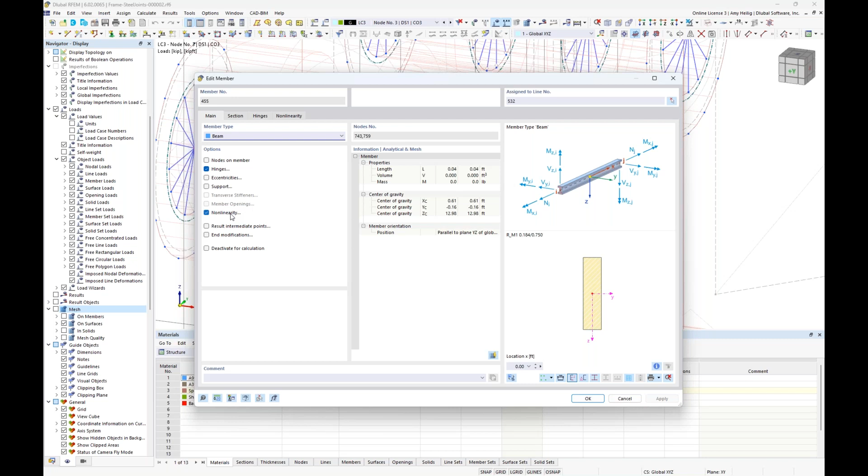We also have a nonlinearity applied here for this beam spoke member that it will fail in tension. So we really want this bolt to bear on to the plate element when it's in compression. But if we have any tension between those two elements, that connection will fully fail.

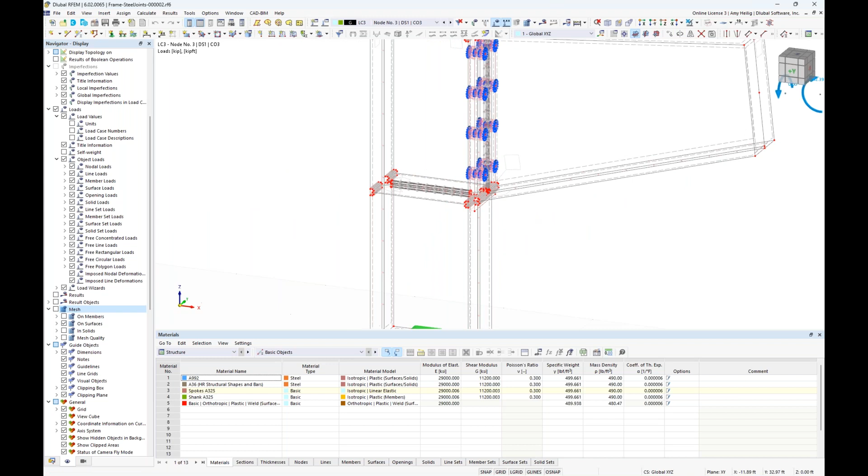So that's what's going on a little bit underneath the hood: it's really just putting together all of these different elements into this FEA model. And by all means, you have the ability to manually create this same exact connection. We're just taking it a step further with giving you the ability to automatically generate this pretty complex model underneath the hood. A couple more things to touch on if we take a look at the materials.

So all of the materials are listed here for our beam elements, and I'll turn this into a rendered view, A992, A36, and even our bolt elements and our welds have the relevant material. But you will see that these are now converted to plastic material models rather than that linear elastic.

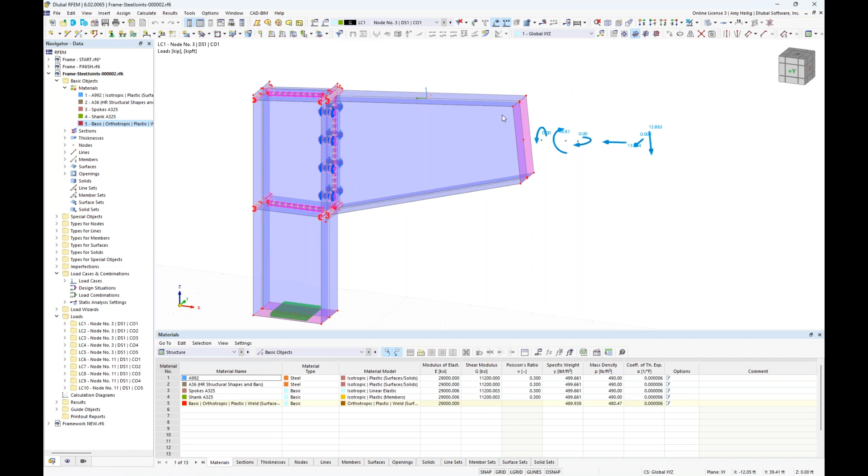And finally, if we take a look at our drop down about all the different loading scenarios here, these are our ASCE 7 factored load combinations that are being applied here to the member end. And as I scroll through these different load combinations, we should see these loads update automatically. They're applied here to a rigid plate. So this rigid plate allows the load distribution across the entire face here.

So we don't have to worry about topics like singularities because this load is distributed again to the entire face of these elements. And remember too, that we had to set at least one supported member. Well, we can see that support applied here at the bottom of the column. Okay, so that will cover here just the submodel.

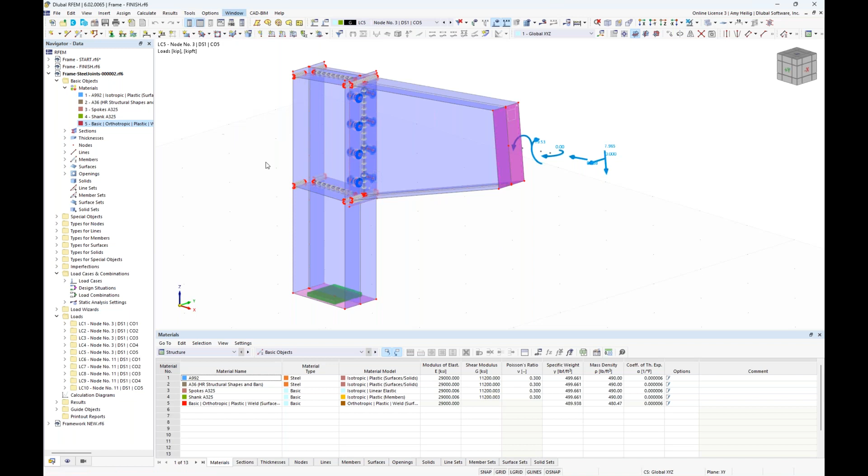So let us go back to our frame quickly to talk about the buckling behavior. So in addition to the design according to the AISC, if we go back to the steel joint design, we have an additional drop down here for the buckling analysis. And looking at the buckling analysis results in table format, we are calculating 4 eigenvalues here for each connection as well as each load combination.

So as we scroll through these, it should highlight exactly which connection we're looking at. And also you'll see here our critical load factor. And if you remember, under the configurations, we told the program to flag us if this critical load factor falls below 15.0. So what is a critical load factor? Well, if we're currently looking at our connection here, and load combination number 2,

the critical load factor is the value or the factor that you can multiply your loads in load combination 2 by before you're going to see some type of buckling behavior. So when we are getting down around to values such as 1.0, this is a very big problem. Anything less than 1.0, the connection cannot handle 100% of the loads before we're going to see buckling. So again, we can set that user-defined value of when to flag us for that critical load factor.

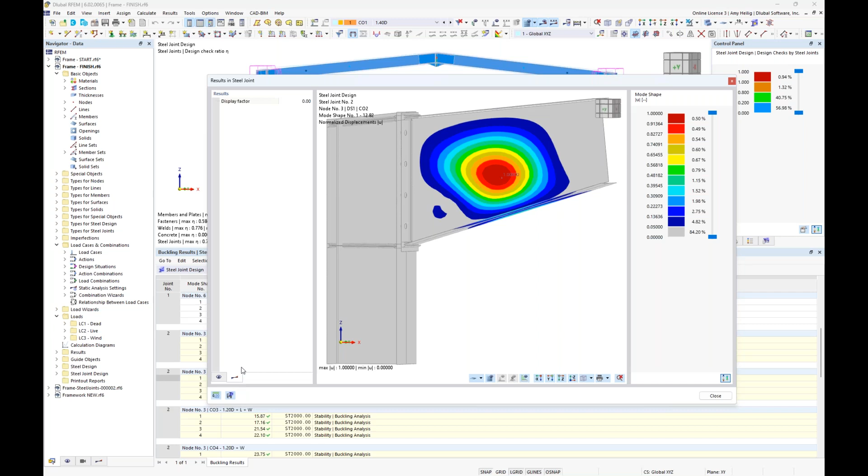What might be interesting too, in addition to the table format, is to yet again launch these results in the steel joint here, and it will look very similar to what we saw before, but there's a slight modification: now that we are viewing our buckling behavior, instead of viewing stresses and strains, we're viewing the eigenvalue, or the eigenmode. So we can see that under this particular load combination number 2 and our critical load factor of 12.82, we might be concerned with buckling within the web of our tapered member.

If we scroll back up here to maybe our center connection, and we'll go ahead and launch the display of the buckling behavior. Notice this critical load factor is much higher for load combination number 1 at 31.09. But in this case, we might be a little bit more concerned with the initial buckling of our flanges, with a secondary concern of these web elements here for that center connection.

So buckling is certainly something that is not easily accounted for with hand calculations, analytical calculations for connections. So we have the ability here to carry out this additional analysis and determine, if buckling is a concern, do we need to increase the thickness of these surfaces, such as the web members or flanges, or maybe we need to add additional stiffeners with those component input options.

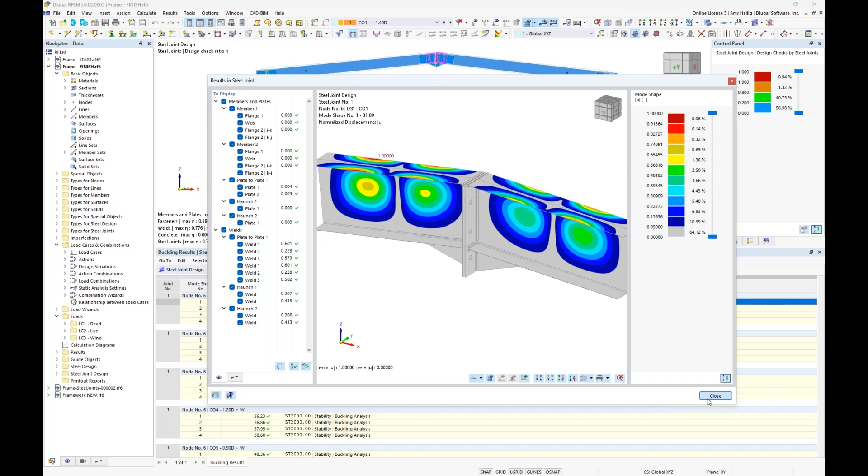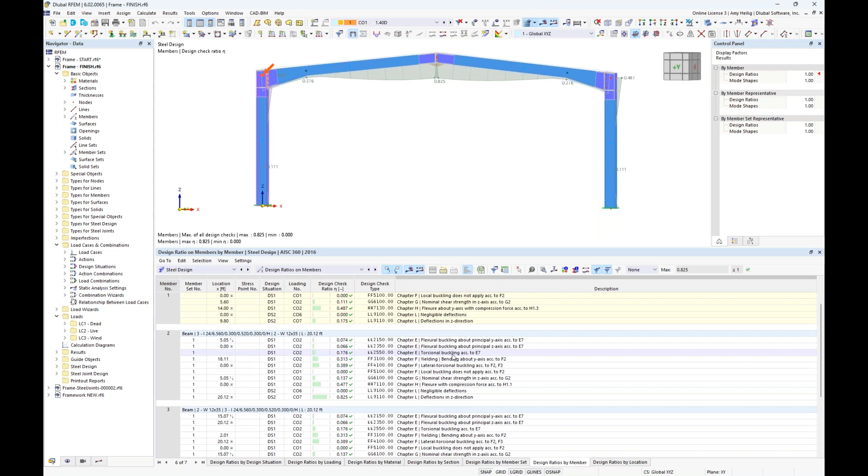So that will sum up the connection design, but keep in mind that we also did the steel member design. So we can view the results of the steel member design within our table format here and the design ratios by each member. And again, just as we would any other steel model, we can get full design according to the AISC. Notice that all of the calculations are carried out with each one of the relevant chapters within the AISC. So the ability to design the members and the connections is just quickly shown with this example model. So that will sum up this example.

Now, I know that this was a very simple application, and we might argue, well, I could easily do hand calculations or use my current software for connections such as this. But I did want to open up another RFEM model with maybe a little bit bigger of a structure. So you'll notice that we have multiple steel members shown in 3 dimensions. And I even have modeled a couple of concrete platforms within this particular structure. And if I go to the wireframe view, you'll also notice that I have defined these joint connections at all of the major intersections of our steel members.

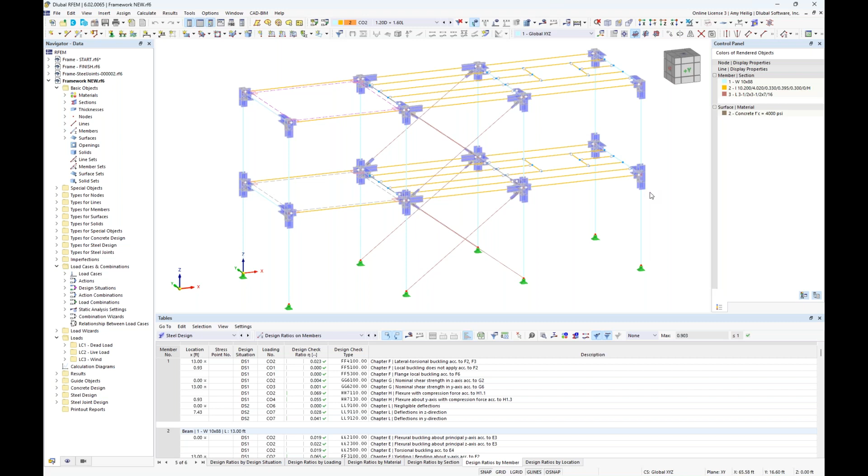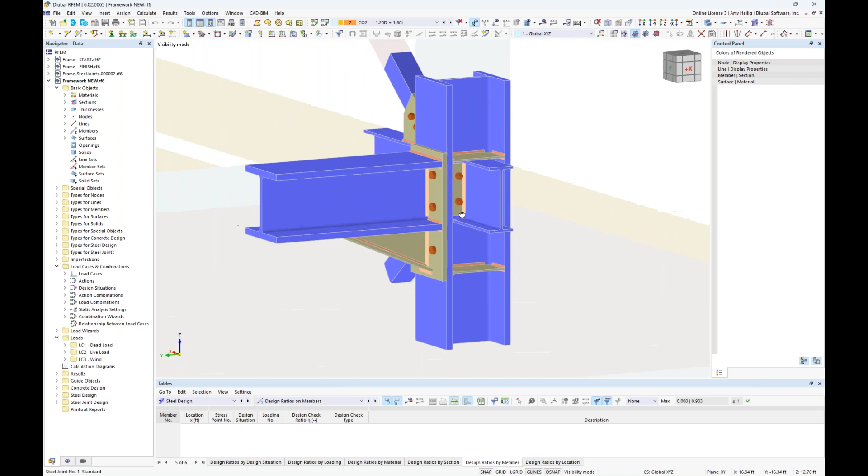So if we take a look at maybe one of these particular connections, I'll go ahead and create a visibility by this selected object. And let me turn this back into a solid rendered view. When we zoom in, we can see that this connection is certainly a little bit more complex than what we just saw with our 2D frame. We have beams framing into the column in the strong axis. We also have beams framing in the weak axis. I have added end plates, haunches. We have stiffeners shown here. So quite a bit more going on.

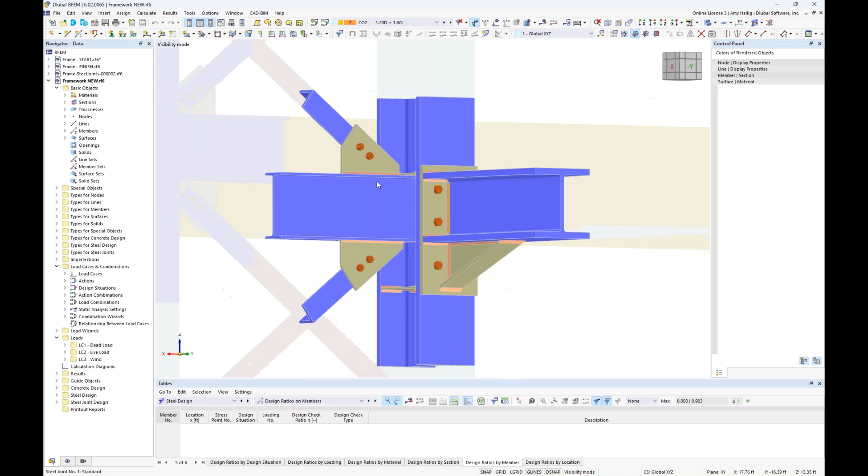If we rotate over here on the right-hand side, we also have these tension-only braces that are transitioning from these plate elements, and they are welded to the top and bottom flange of my beams. So we also can carry out, of course, the full connection design here. I'll go ahead and zoom out and rotate this back around. Under the steel joint design, you can see that the design ratios for each of these nodes are carried out. We have 3 design checks here for our plates, our bolts, our fillet welds, with an all-encompassing FEA submodel for each one of these connections.

And we also have carried out the steel design. Again, all of these steel members have been automatically designed according to the AISC, and I even took it one step further to design these concrete platforms. So I carried out the ACI design, considering the reinforcement applied. We see a couple high reinforcement design ratios shown here. That's no surprise, an issue of shear where these platforms are connecting back to the steel members. But all in all, an all-encompassing option within RFEM to do a multi-material design along with the AISC connection design as well.

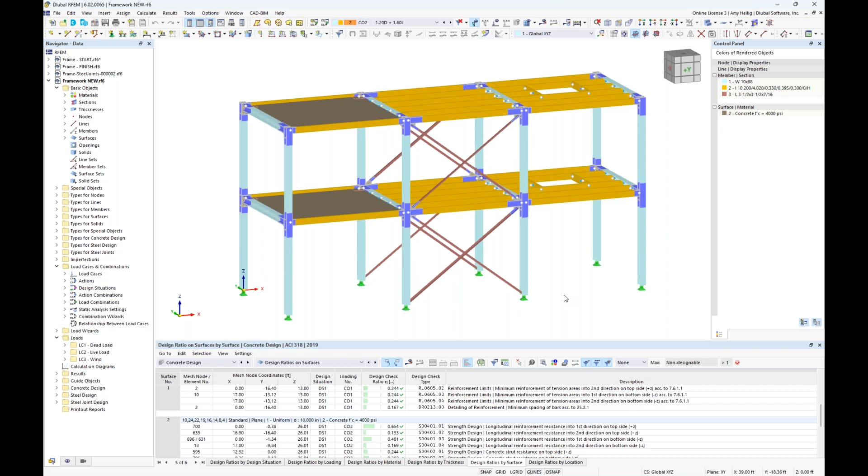But the only exception to this is round HSS. So currently we support square and rectangular HSS. Round HSS is currently in development, should be released very soon. A preloaded bolt input is also not quite ready, but is currently in development for topics like slip critical connections. So that should be available very soon.

We also recognize the AISC 360 2022 was released. So we'll go ahead and add any updates to the standards. You have the ability to design according to the 2016 or the 2022 as soon as we implement that.

Additionally, we are planning to add the ability to export out the true stiffness of this model back to the main structure. So this joint stiffness is already calculated with this FEA submodel. We know this of the connection. So therefore, we can export out that stiffness for the member design rather than having fully fixed member end releases, fully released. We'll be able to account for the true stiffness there.